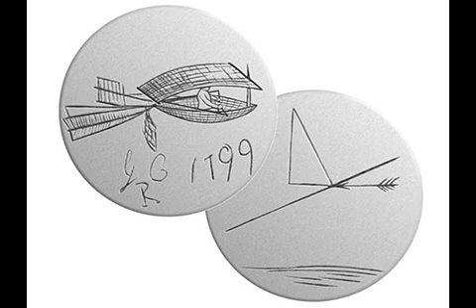In 1799, he engraved a small silver disc, now in the collection of the Science Museum in London, and only discovered, in fact, in 1935, in which he illustrated some of the key concepts which will inform his subsequent inquiries and experiments. This is the much enlarged version of the disc. On one side of the disc, we have the image of a monoplane with fixed cambered wing and a boat-shaped fuselage and a tail.

This configuration is seen by many as a blueprint for the idea of a sustained winged flight. On the reverse is a diagram indicating the forces of lift and drag which operate on a lifting surface.

In his 1804 notebook, Cayley includes a design for an experimental glider, first of many. This is probably the basic design for what Cayley himself termed a flying parachute. He never uses the term glider, nor does he ever use the term glide. He uses the word skim instead, extensively, in his study of bird flight. And this was developed into a series of later machines.

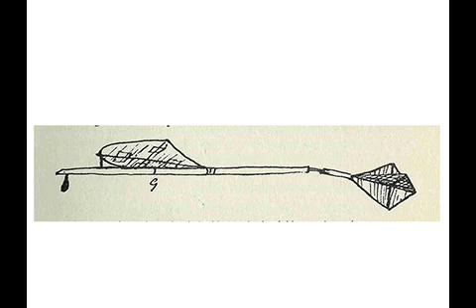Laurence Pritchard, in perhaps the first really serious study of Cayley's work, or one of the first along with Charles Gibbs Smith, writes, "The systematic measurement of pressure on surfaces at different angles to the air stream, so essential to the extensive and complicated aerodynamics for flying, these were the first to be made, as far as we know." So Cayley is seen by many, not only now, but in his own lifetime, as really instigating the first serious and systematic program of aviation research.

But these ideas of circular motion, which came from the whirling arm, had to be tested against the straight line motion of flying machines, hence the work with the gliders. And we begin to see here something that is very characteristic of all of Cayley's work, the matching of calculation and practical experimentation. Cayley's research included also a very detailed study of bird flight.

He writes, "I have weighed and measured the surface of a great many birds, but at present shall select the common rook, because its surface and weight are nearly as possible in the ratio of a superficial foot to the pound. The flight of this bird, during any part of which they can skim at pleasure, from an average of many observations, is about 34.5 feet per second. The concavity of the wing may account for the greater resistance here received than the experiments upon plane surfaces would indicate.

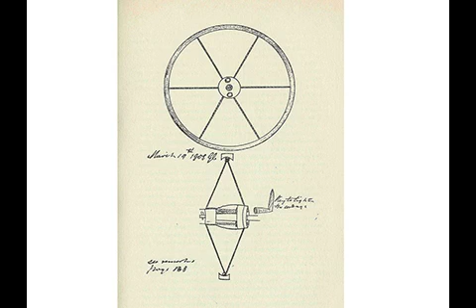And in this paper, he also formulates what is seen as a classic definition of the problem of flight. The whole problem is confined within these limits. That is, to make a surface support a given weight by the application of power to the resistance of air. Very compressed statement, but one which identifies many of the very key aspects of the conceptualization of the idea of flight. The whole problem is confined within these limits. To make a surface support a given weight by the application of power to the resistance of air.

And he then engages in the question of the concave wing. The flight of birds will prove to an attentive reader that with a concave wing apparently parallel to the horizontal path of the bird, the same support and resistance is obtained. And hence I am inclined to suspect that under extremely acute angles, with concave surfaces, the resistance is nearly similar in them all. I conceive the operation may be of a different nature from what takes place at larger angles,

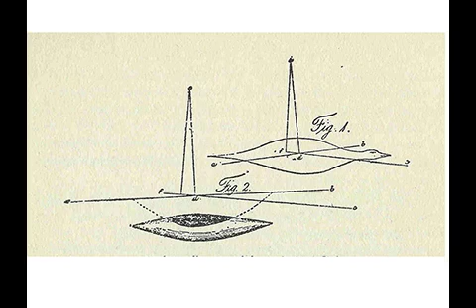So we have then this separation of the component parts of flight, and then the discussion of how birds in flight can inform the mechanics of man-made flight and man-made machines. Cayley is aware, however, that he and his contemporaries are at the beginning of a very long and complex process, because he says in this paper, quote, "Every man acquainted with experiments upon a large scale will well know how leisurely fact follows theory." So he's giving himself some leeway, some time to get there.

Tom Crouch from the Air and Space Museum at the Smithsonian, in his book Wings, summarizes Cayley's achievements in the tripartite papers as follows. They are to confirm earlier suggestions that a curved or cambered wing produces greater lift than a flat plate set at a low angle of attack, identifies an area of low pressure on the upper surface of a cambered wing in flight and an area of high pressure on the underside, suggests that angling the tips of the wings above the center line of the aircraft, creating a dihedral angle, will produce a measure of lateral stability.

In other words, dihedral configuration is one in which the wings are angled like this, the tips of the wings are at a higher point than where the wings meet the fuselage. His work provides the earliest studies on the movement of the center of pressure on aeroplane wings under flight, and explains how to calculate the performance of a flying machine.

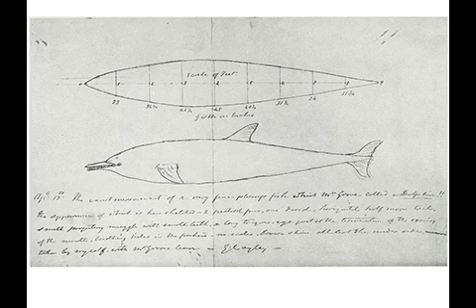Many other inventions than those in aviation are carried out during this time. Back in 1809, he had published. Oh yes, this is just an example of his studies of dolphins, showing how he's applying the same observation and calculation in terms of natural mechanics to fish life as to birds. We'll come to that in a moment.

He publishes proposals for the rebuilding of Covent Garden Theatre, the precursor of the Royal Opera House, which had been destroyed by fire the previous year. His designs aimed at improving the audience's visual and auditory experience, and many safety suggestions: the introduction of a fire curtain and easy access to main and emergency exits. And in 1856, nearly 50 years later, that paper was reprinted after a second fire at Covent Garden.

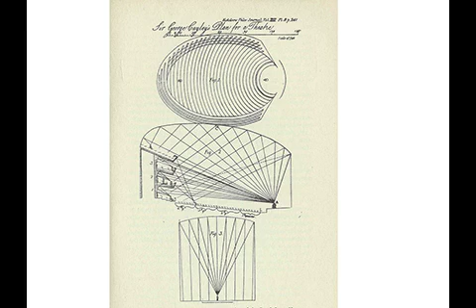In 1825, he published his proposals in the Mechanics Magazine for what he called a universal railway, a forerunner of the Caterpillar tractor.

In 1830, he witnessed the accident at the opening of the Manchester to Liverpool Railway, which resulted in the death of the politician William Huskisson. And he began proposing suggestions for railway safety, particularly relating to buffers and brake systems. And he was particularly engaged with the issues involved in the loading and unloading of passengers and goods. He argued, for instance, for the universal introduction of separate rail systems.

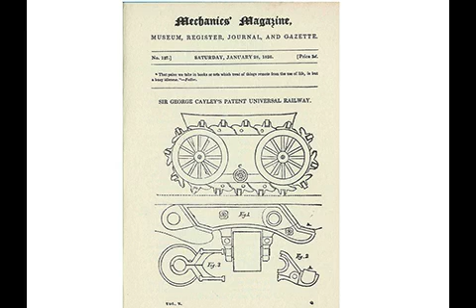And he protested vigorously at the iniquity of placing second-class carriage passengers in the rear, the most dangerous part of the trains. He says of this, "Let me add that the present method of placing second or third-class carriages on the rear to serve by being smashed up with the bones of their passengers as buffers to those in first class is most disgraceful and inhuman." But there is really quite a substantial body of papers that deal with these issues.

Just going back to that, that's the Caterpillar tractor. I put that up because I think it shows rather nicely the relationship between the finished, as it were, drawing for publication, and Cayley's notebooks. And there's something about the notebooks that is very alive, that in a sense, even in the clarification that you get in the printed form, there's some sense of loss.

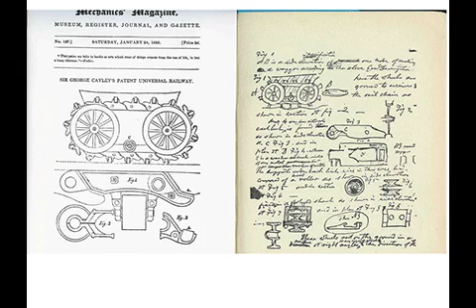And of course, one of the big problems, I think, for Cayley's studies and for talking about Cayley's influence was that the notebooks didn't become known until into the 20th century. And it's interesting to speculate what would have happened if the notebooks had been published in his lifetime or shortly after his death, and whether the combination of published works and notebooks would have led to other advances in aviation theory and practice. There are some examples of his buffer proposals for railway engines.

In 1845, Cayley published an account of an artificial hand, a prosthetic hand, he invented for George Cayley, who was the son of one of his tenants, who'd lost his right hand back in 1839, but the stump of the hand was too raw for some time to have any attachment to it. In fact, the hand is not attached to the stump. It is attached higher on the arm. So effectively, you have 2.5 arms if you wear this. So the hand is strapped to the upper part of the limb affected.

For lightness, it's packed with cork. But while it had little flexibility, it had fairly considerable lifting capacity. Apparently, you could lift a weight of up to 70 pounds with the use of the hand. Cayley was brought to London, and Cayley and the hand were demonstrated widely, including at the Royal Polytechnic Institution and at a soiree held by Lord Northampton, the then president of the Royal Society, present at which were Prince Albert and the Duke of Wellington.

And I think there's an interesting link between this and many of Cayley's experiments, particularly this, with the metalwork that he himself learned in Walker's workshop, and which he was developing in his own workshop in Brompton. Cayley apparently became eventually disillusioned with being what he described as a freak or a spectacle, and left the hand one day and went back home. But Cayley published adaptations on the hand for some time.

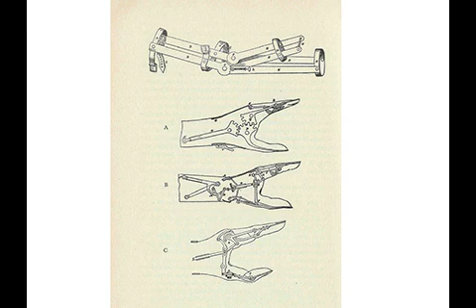He had also earlier on engaged with his old friend from London, Major John Cartwright, and he published a paper on parliamentary reform, a paper addressed to Cartwright. We had that earlier, in which he lays out a gradualist position. He's prepared to say in the paper, perhaps one day the day for universal suffrage will come, perhaps even for republicanism, but it's not now. And he has a very strong sense that the social order has to be kept, in a sense, in balance.

And we find another expression of this in a curious incident in 1816. Cayley's mother had become a fervent Methodist, and Cayley was opposed to the establishment of a Methodist chapel on his land, on his estate. He's away from Brompton. He comes back and finds, to his great annoyance, that his mother has been instrumental with others in buying land on which to build a chapel. And an extraordinarily ritualized, antagonistic debate takes place between himself and his mother. And he posts up his position publicly on this.

He says, "I admit a full right for the individual judgment in matters of religion, and I have no objection to my tenants professing whatever religion they please, provided it does not prevent that wholesome and natural dependence of one rank of society upon another, which has hitherto so firmly sustained the fabric of British strength and raised it to the first class among nations. It is the leading fault in your doctrine," this is addressing the local Methodists, "that it tends to undermine this natural compact between the higher and the lower ranks in society."

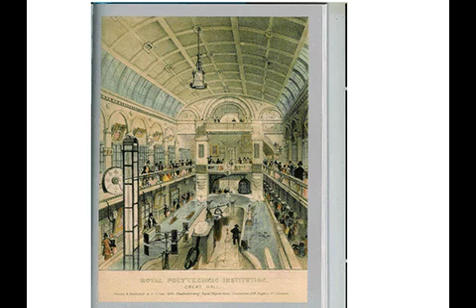And so we go through a list of inventions, new ideas, new patents that are being demonstrated and advertised. So the education of the eye sets the institution within a tradition that is to lead to the establishment of the South Kensington Museums.

Another later, more detailed description of the Great Hall, and here giving you a sense of the scale, the size of the diving bell. Cayley's

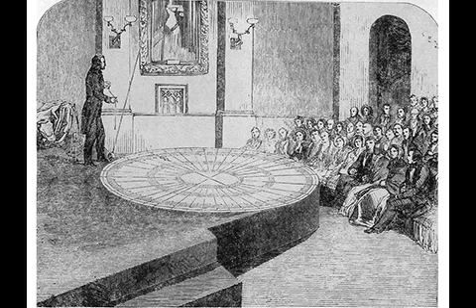day-to-day relationship with the Polytechnic can be quite sporadic, but there were certain things that did fit in very much with his interests, particularly the demonstration of Green's balloon, Green the transatlantic balloonist, or aspirant transatlantic balloonist. But here you see a bill of fare from Green's balloon, the diving bell, to the microscope. And here, again, as under a suggestion of Cayley's, is a demonstration from the early 1850s of Foucault's pendulum.

One of the major new technologies, new inventions, for which the Polytechnic became famous was the new discovery of photography, and initially of the daguerreotype portraiture. Henry Fox Talbot demonstrated his patent work at the institution, and here Beard, the portrait photographer, has set up studio, one of, if not the first, one of the first photographic studios in Europe.

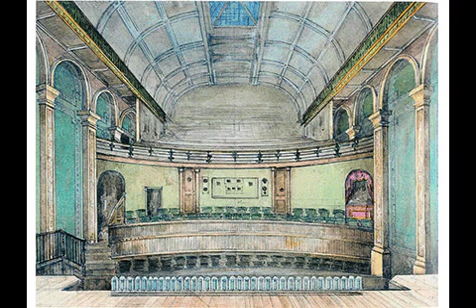In 1848, a large theatre is built, and this allows for the development of massive projections and the development of lantern slides, for which the institution was to become nationally and internationally famous. This shows one of these, and associated very much with this, the optical spectacle, was Professor, as he was named, Henry Pepper, who became the head of the educational work at the Polytechnic and effectively its director.

Pepper is best known for his famous invention, Pepper's Ghost. Here we see it at the top. But he also published numbers of important books popularizing science, which were known internationally.

And in fact, it was very much under Pepper's influence that the institution began to develop in the mid-1850s its educational work in relationship to the introduction of examinations by the Royal Society of Arts in 1856. And this shows us a spectrum analysis, one of the more, you might say, academic uses of the new technologies. And this is a prospectus for the institution in the first term at which it is working alongside the Royal Society of Arts.

And this tradition, developing through lantern slides, was to develop later in the 19th century to film. And in the university's building at 309 Regent Street, we have the site where the Lumiere brothers first presented film in 1896.

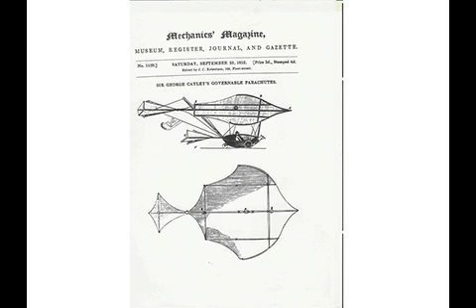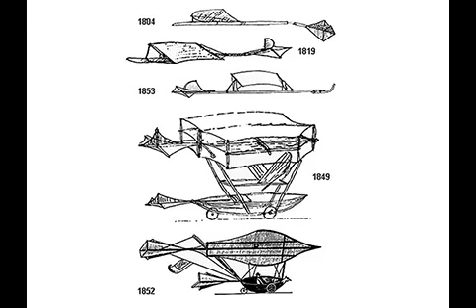And that's a sort of composite of some of his machines, from early gliders, going from 1804 right up to the one I'll be talking about in a moment to finish with, in the early 1850s, to possibly the boy carrier and to the governable parachute. We have Cayley's report of the boy carrier. More problematically, we have this machine.

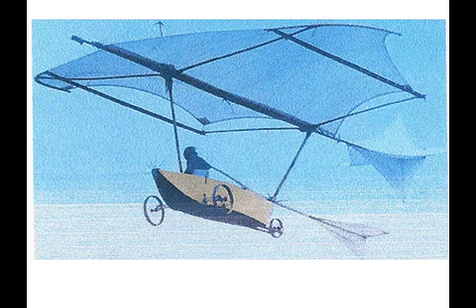This is the famous Coachman from the Anglia television program of 1972, Reconstruction. Another shot from that film, and this the photograph of the reconstruction that was made for the IMAX film in Washington, a film called On the Wing. We'll just hold that one for a moment.

The Coachman story is well known, and its status is problematic. It's a very good story. It ends with a great line where the coachman says, "I was hired to be a coachman and not to fly." We don't have a record by Cayley himself of it. We have records that are made many years later, so there may be an element of legend about this. On the other hand, there seems no reason to argue that it didn't take place.

And the fact that reconstructions made of it have also flown. These reconstructions that I've shown seem to show its viability. It has then this sort of status as being the first man-carrying, man-piloted flight, though without a powered engine. The reconstructions took place under the guidance of Commander John Sproule, for the Anglia film, and then for the IMAX film, and

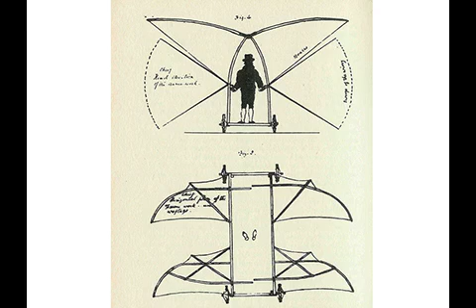But the French had organized their aeronautic work, and Cayley wrote to them, showing them this design, which I like particularly for the lovely drawing of the two little feet in the bottom one, but also for a design which was known as the riding rudder design. This is it, the last of his gliders, his hand gliders, which you see here on the top.

And under John Sproule, this was made for the Anglia film, and then at the Polytechnic of Central London, as we were, and again as the University of Westminster in 2003-04, we made a replica of this machine in the architecture workshops at the university. Cayley describes the design.

The sail is 6 feet 2 inches long by 4 feet 3 inches wide, sewn on flat oval yards, 6 feet long and erect and elevated 1 foot 4 inches above the shaft, 12 feet long. Again, very, very precise description. The vertical rudder for side steerage contains 2 square feet.

There's a curved prop of iron to ease the shock when it alights on the ground, and the weight being screwed to that shaft at a greater or lesser distance from the center of support, enables the center of gravity to be placed as much in advance of that point as is found requisite to give the proper inclination for the descent of this sort of parachute. The whole

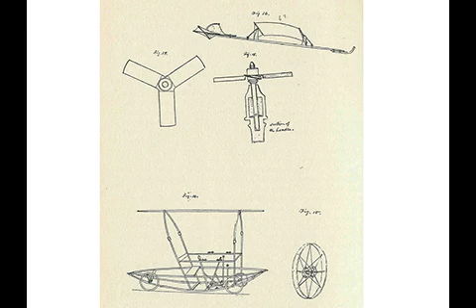Cayley's position in aviation history is one that raises many questions, many perhaps and ifs. Was he ahead of his time? If you read his obituary in the Times on the 18th of December, 1857, there's hardly any mention of his flight work at all. There's some mention of balloons. There's a lot of mention about hot air engines, a lot of mention about his public work. He's in a sense against the grain. He's known among a group of scientists and inventors. So perhaps he's just ahead of his time, and this explains why his advances were not made more quickly.